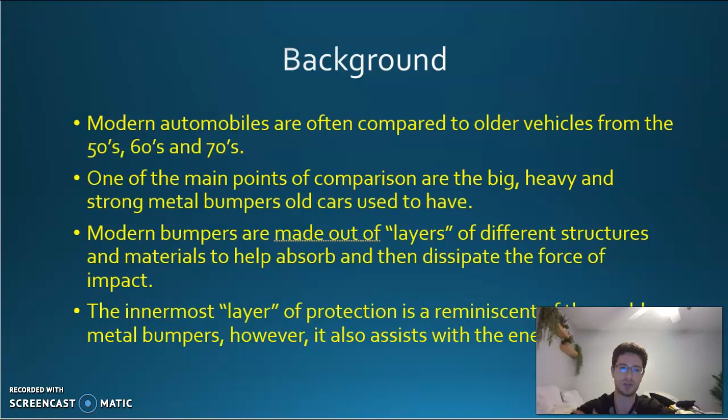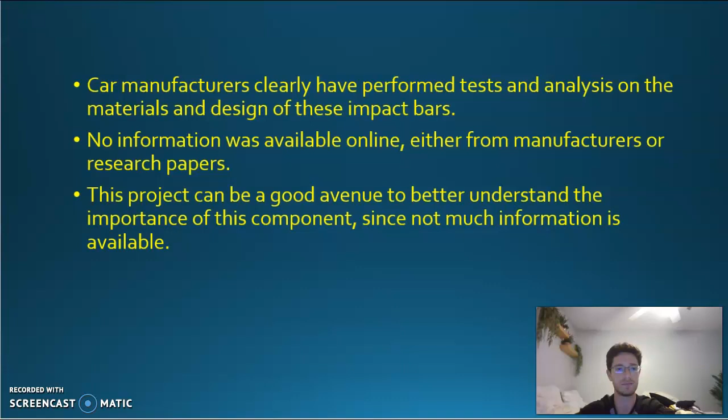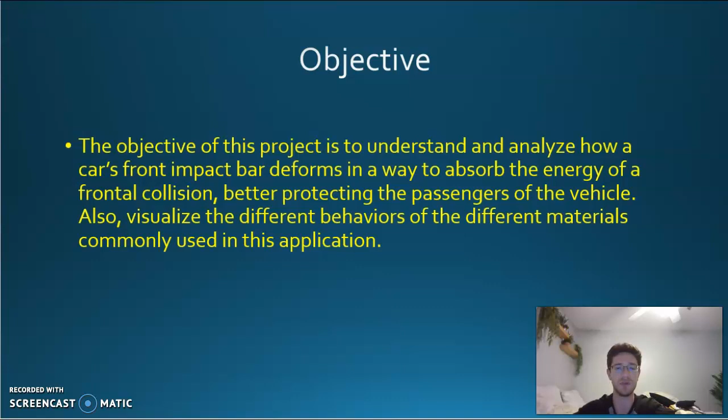So I can see this project being a good avenue to better understand the importance of this component, since not much information is available. The main objective of this project is to understand and analyze how a car's front impact bar deforms in a way to absorb the energy of a frontal collision, better protecting the passengers of the vehicle, and also visualizing the different behaviors of the different materials commonly used in this application.

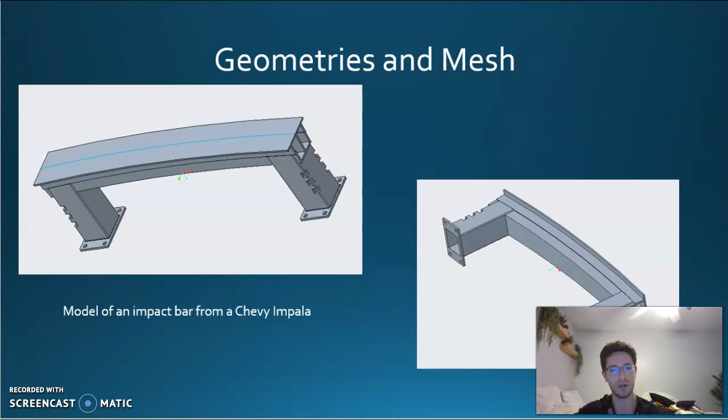Here we can see the geometry that I used. I based this geometry on the impact bar from, I believe, the 2016 to 2018 model year Chevy Impala. It is as close as I was able to get to the real model without having proper measurements, but design-wise, it is exactly the same. However, when it comes to the analysis, I had to simplify the model, mainly the supports, as you can see on this meshing image, which I used to do the analysis, with a mesh size of 20 millimeters.

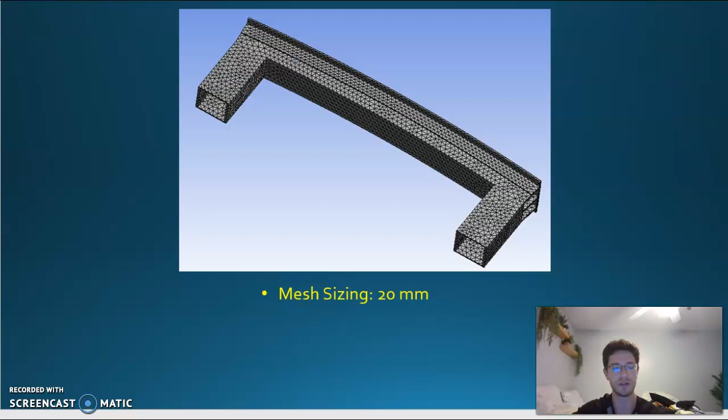And here, after the analysis, you can see the deformation plots. The first one is a true scale deformation under a load of 100,000 newtons. Then you can see a deformation with a 2 times deformation enhancement, and then a 5 times deformation enhancement. One thing that I need to better understand is that whenever I ran this simulation, as you can see on the first image, the true scale deformation, the bar didn't bend at all, especially under such a heavy load.

On my first try, about a month ago, when I used a more simplified model, it bent under a load of 10,000 newtons, I believe. So I need to better understand why this is happening and what's going on with that.

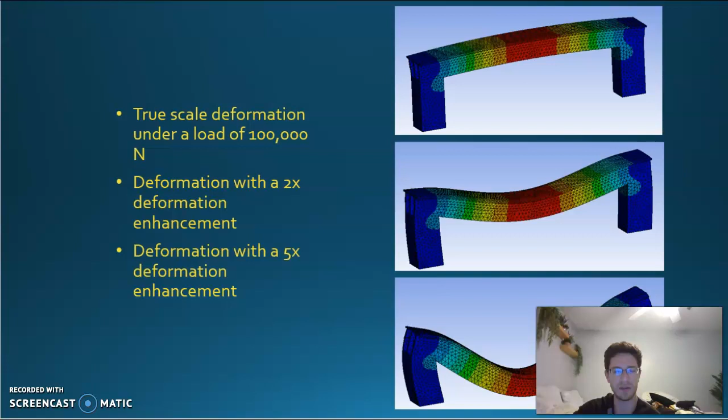Here you can see the stress analysis from Workbench. As you can see, the maximum stress value was about 93.485 megapascals, which is significantly lower than the yield strength that I used for this bar, which was around 250 megapascals. So the bar didn't fail; it wasn't even close to failing.

One thing that was interesting though was the location of the maximum stress. As you can see on the bottom image, it was right on the corner where the mount would connect to the bar. And I thought it was interesting because one could assume that the maximum stress would be where all the force is being applied, which is the front of the bar. But it was very interesting seeing that it was actually at that pretty much 90-degree angle bend.